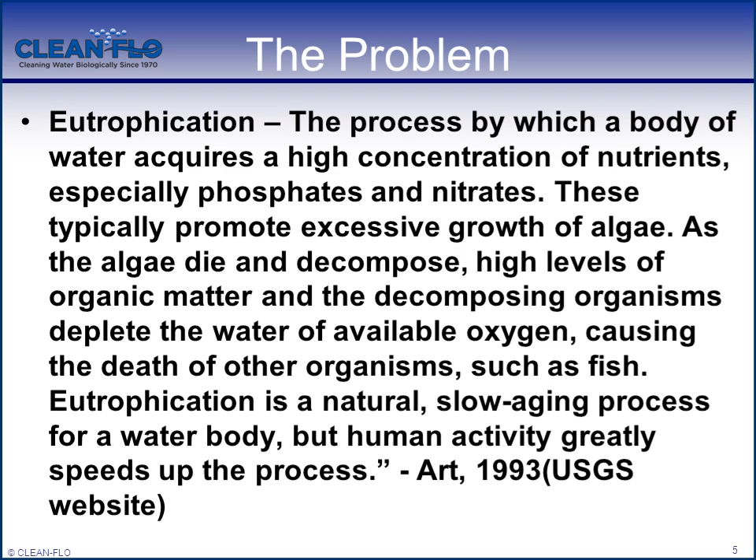EPA's website talks about nutrient pollution as being one of America's most widespread, costly, and challenging environmental problems. The problems in the Chesapeake Bay are all caused by nutrient loading coming through the Susquehanna. The Susquehanna has problems of its own. It used to be a world-class bass fishery down through the southern part of the Susquehanna. I used to fish it every Saturday and Sunday as a kid. The bass now have endocrine disruptors so that they aren't actually breeding anymore in the Susquehanna. It's all a result of nutrient pollution and eutrophication.

Herbicides and pesticides may exacerbate the problem. A lot of people will go out and see weeds and algae, and they'll immediately start putting copper in, other compounds, reward, trying to kill the plants. The problem is that every plant you kill goes to the bottom and ultimately in the decay process uses up oxygen.

What happens is if you went out on the lake during the summer, in the middle of July for instance, and dropped a dissolved oxygen probe down through the water column, you would see that oxygen levels are high at the surface where you get wind and wave action. As you drop that probe down through the water column, oxygen levels start to drop. Closer you get to the bottom, many times we see zero oxygen at the bottom, meaning those sediments are totally anaerobic. If you pull them up by hand, you would smell hydrogen sulfide. There's methane in that muck and those sediments as well.

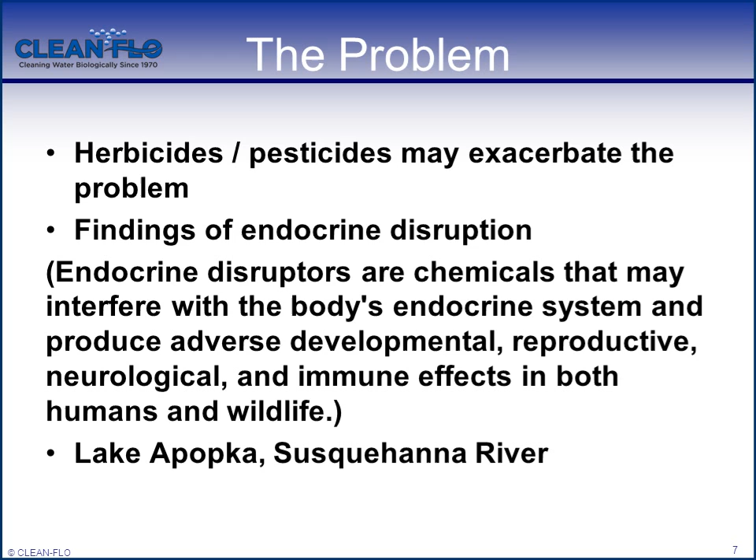So what do we do? We basically call our process inversion oxygenation. We want to get oxygen from the top to the bottom and into those sediments at the bottom. Just think of it, if you have a compost pile on your property, what's the best way to get that to break down quicker? You turn it, you get air into it. So when you turn it frequently, you're getting air into it, that gets oxygen into it, that lets natural microbes break that down.

We're doing the same thing, but we want to do it to the very bottom of the lake. And we're going to do it with laminar, non-turbulent flow principles, so that even though we're circulating a lot of water every minute, we're doing it in such a way that turbidity and suspended solids actually reduce and don't increase. So the water quality gets better, and meanwhile we're going to maintain aerobic conditions at the bottom. Hydrogen sulfide gets eliminated, methane gets eliminated, carbon dioxide gets eliminated.

So you don't have the noxious gases on the bottom that would typically build up. By doing that, we can introduce beneficial microbes. There's natural microbes as well, but we usually introduce some additional beneficial microbes to really promote the process. And those microbes will then go and start to break down all that organic material and take up the nutrients.

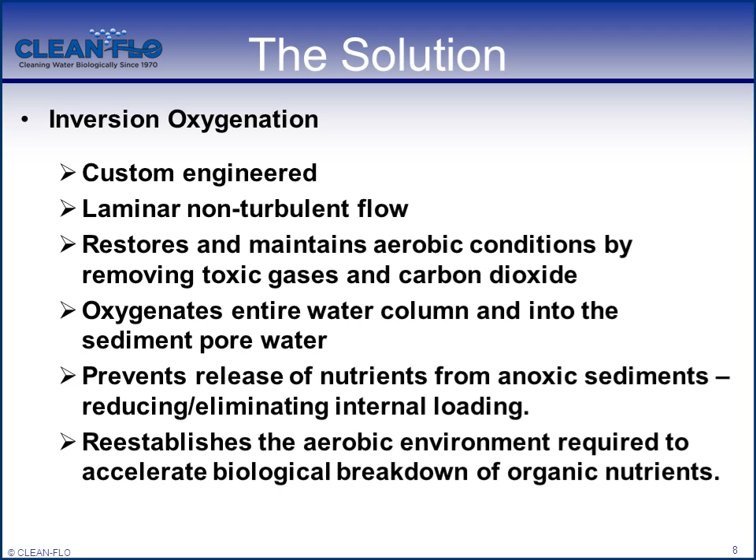So what we've done is designed a solution that includes compressors and air line, which is self-sinking and sits on the bottom of the lake, plus distribution manifolds which take the air and distribute it to multiple diffusers that sit on the bottom. Those diffusers are microporous ceramic.

All right, what's your minimum safety protocol for such a line being on the bottom if you have speed boats going over the top? As far as depth, you mean? Correct. It's probably based on the depth of the draw of the boat, but we've had these lines in 2 feet of water and haven't had a problem. 2 feet of water, but not a motorboat going over it? In some cases, yeah. Now if you've got a draw, if the prop's down 2 feet, you're probably going to whack it, and in that case we may have to make some adjustments.

That's a thick-walled, self-sinking airline. It's 5/8 ID, 1.02 OD, so it's pretty thick. If someone hits it with a prop, it's going to get sliced and would have to get spliced back together. So in some cases, quite frankly, we do not want to have diffusers in 2 feet of water.

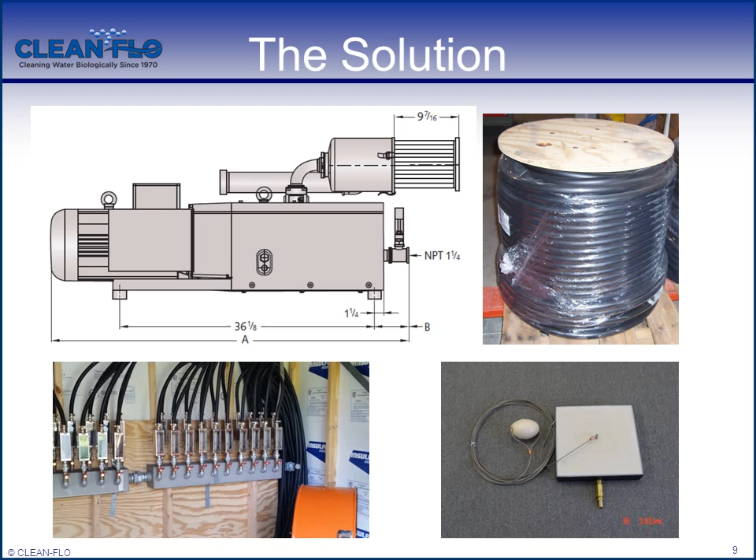Back to my original question, what's your minimum safety depth? I'm just curious because we have some shallow ends, and I want to know your safety parameters. Well, we'd have to look at where the diffusers are going to lay out to see what the water depths are. Every diffuser in our preliminary design is in deeper than 5 feet of water, so I suspect the airlines will be in deeper water too. We're not pushing these up into 2 feet of water because the bubbles stay in the water such a minimal amount of time from a diffuser at that depth. So we've got these at a minimum of 5 feet of depth.

Bioaugmentation basically revolves around the fact that when you have anaerobic conditions at the bottom of the lake, beneficial microbes, which are aerobic, have no oxygen to survive. And when you have no microbes at the bottom, that's when you start to build up that muck layer, because it's anaerobic and the microbes cannot survive. So when we fire up aeration, natural microbes slowly start to come back into the process—there are microbes on the grass around the lake, microbes in the leaves, and ultimately natural microbes get into the lake.

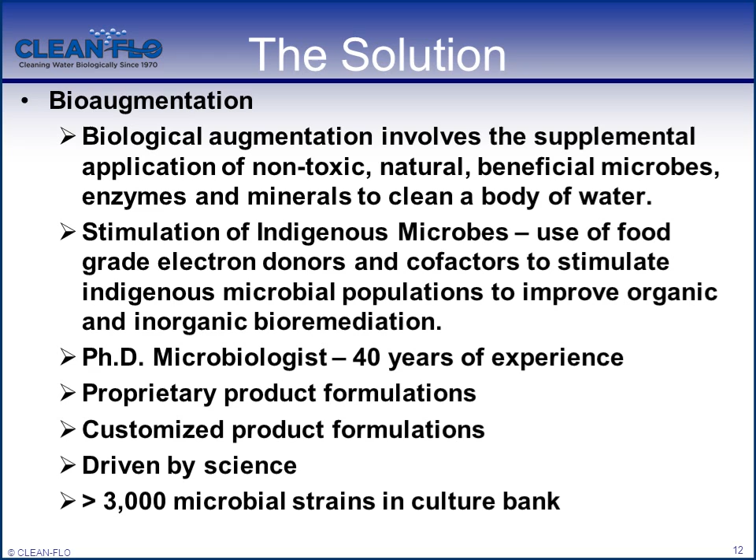This product is called Winter Warrior. Typically microbes love warm water. In the Lake Apopka project, we were able to reduce 1 to 1.5 feet of muck in 10 months, since the water was warm the whole time. Microbes perform better when the water is 55 degrees or higher, so when we work down south, muck reduction happens quickly. When we work up north, it happens much more slowly.

In this area, we'd estimate 4 to 8 inches of muck reduction a year, running the system throughout the season, roughly March 15th to December 1st. In winter, you'll probably want to shut the system down. We do run systems all year in a lot of locations, but most people shut it down just for liability reasons.

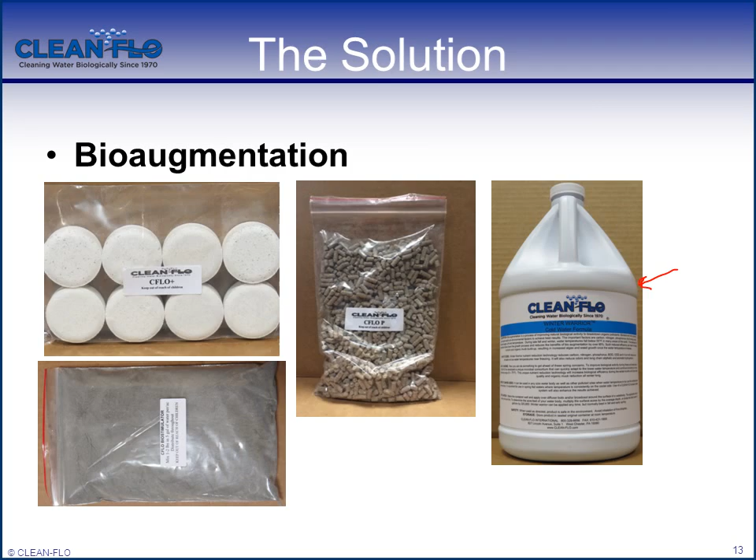I'll show you an example of one in Puerto Rico. We've also done rivers, including designs for three dams on the Susquehanna: the Conowingo, the Holtwood, and one other I forget. Behind those dams, when they dammed up the river, they created a big eutrophic area that's now just accumulating nutrients. When Hurricane Irene toppled over the Conowingo, all the nutrients from inside it went downstream and killed all the shellfish in the upper end of the Chesapeake. There are aerial images showing the contamination going down into the Chesapeake, and all the oysters, crabs, and clams were wiped out.

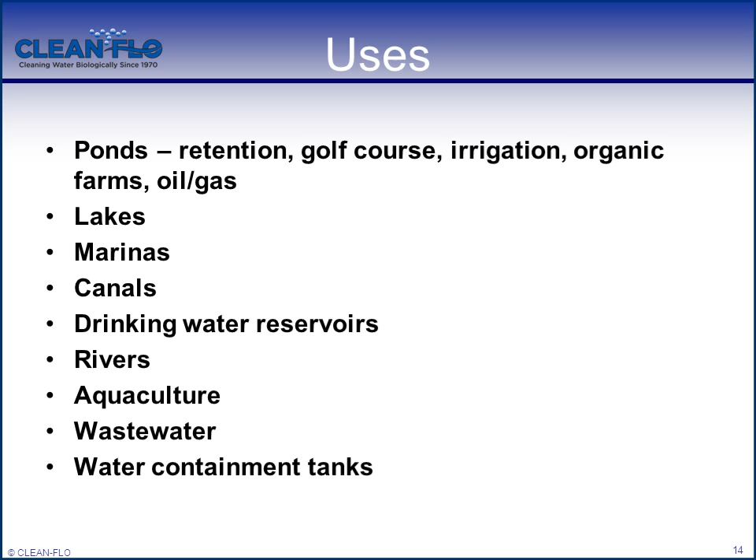Sometimes lakes don't even think about testing for bacteria, and especially because of leaking septic tanks, we'll often find coliform levels higher than state limits. Our process reduces pathogenic bacteria because they don't like highly oxygenated water, and since we're constantly moving water to the surface, UV from the sun knocks out the bacteria. We can very quickly reduce bacteria levels.

Did you have a question?

Just listening — odors, fish kills. Aeration actually improves the overall fishery. So if anyone here fishes the lake, give it two years, and you'll see the fish will be bigger, livelier, more vigorous in the fight, and you'll also develop a higher biomass, so you'll have better reproduction rates.

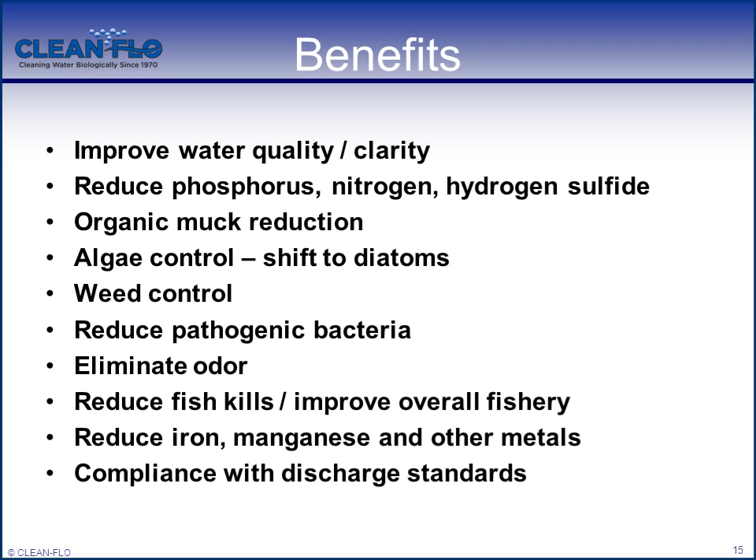Other benefits include oxygen levels and ice prevention in some cases where it's needed. We basically have a lot of these systems in organic farms.

You've heard some of the problems with bacteria, like at Chipotle, for instance. That's coming from their irrigation water. They're irrigating out of ponds that are eutrophic with high levels of bacteria. They put it on the lettuce, it goes into the store, it's not blocked properly, and the next thing you know people are developing digestive issues. So organic farms have increased the need for aeration. They want to clean the water and make sure bacteria levels stay down.

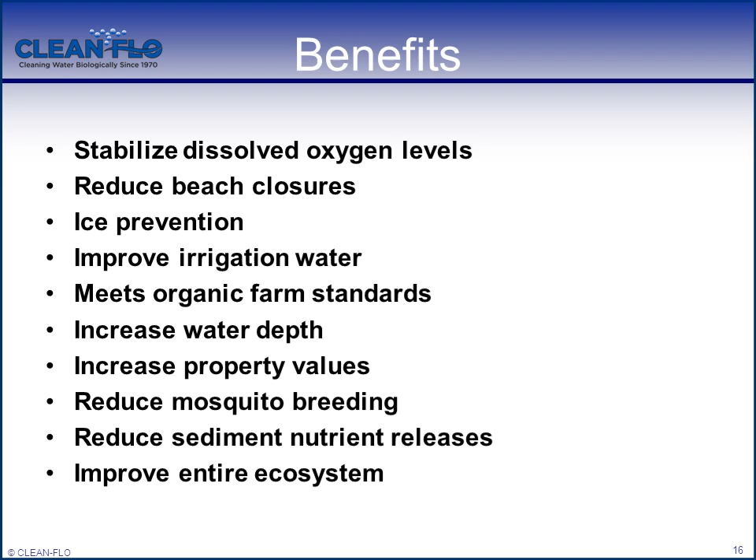One thing we always talk about is increasing property values, because if you can improve the lake, reduce nuisance algae growth and nuisance weed growth, that's a big deal. There are a lot of lakes in this country with blue-green algae, and blue-green algae is now found to be a trigger for ALS and Alzheimer's. There's a lot of science being done on identifying blue-green algae, and there are many forms of it, but one of the things our system will do is reduce blue-green algae by reducing nutrient levels.

Here's Lake Apopka, a 30,800 acre lake, with a pilot area of 250 acres and tremendously high levels of blue-green algae, off the charts. I was almost afraid to be on the boat with the levels of blue-green in there, and there was a tremendous unconsolidated flock. At one point there were 28 fish camps around the lake; today there are zero. So we went in, designed the system, and did the whole thing.

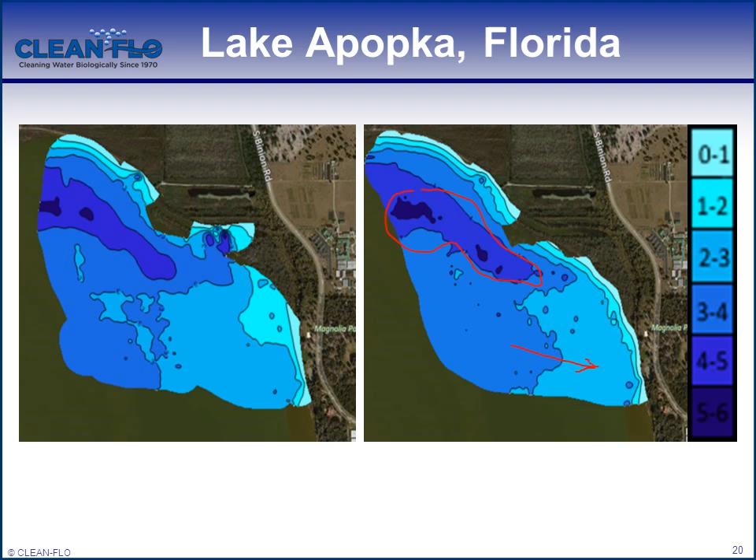Here's the depth testing, done through a program called BioBase. Ideally we want the maps to get darker over time. This is at the beginning, this is after 4 months — you can see the darker area starting to move in. This blue area got longer and wider, and this area is starting to pull down. After 10 months, the blue area pulled down across just about the entire area. We picked up anywhere from a foot and a half to 2 feet of additional water depth in this area in 10 months.

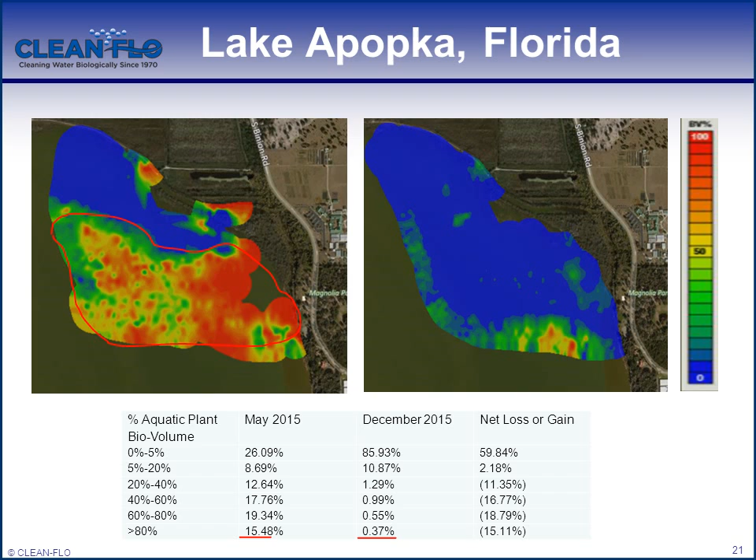This is another way to look at it — a biovolume map. Again, we want everything to get darker over time. The higher levels of biomass show as yellow and red, so you can see what happens over time: the biomass gets wiped out and we start to get back to hard bottom. In this case, 15.5% of the area had over 80% biomass, and after 7 months that had dropped to 0.37% biomass in those areas. That's just an aerial of the area — the lake is quite large, and we basically took an area like this and isolated it.

Here's a drinking water reservoir. A lot of times in drinking water reservoirs they deal with iron and manganese, which raises treatment costs and produces a taste and odor issue at the other end. If you've ever been out of town in a hotel, taken a drink of water, put it up to your nose and smelled foul odors — chances are that water's coming from a reservoir that can't deal with all the iron and manganese. The benefit of aeration is that we can flock that iron and manganese to the bottom, so they no longer have to treat it at the plant. Using aeration in drinking water reservoirs is highly beneficial — typically the payback occurs within the first year just from plant savings.

This particular plant had 6 intakes, and the water could fluctuate 70 to 80 feet. They would always pull off the top intake, and as the water dropped, they'd pull off the next intake, and the next. They could never pull off gates 5 and 6 because the water quality was always so bad. As I said earlier, oxygen is always high at the top and low at the bottom. With a gate 15 feet off the bottom in this reservoir, the water quality was so bad they couldn't open it or use it because they couldn't treat it — they would have been putting contaminated water in people's taps. It was blue-green algae dominant with many fish kills.

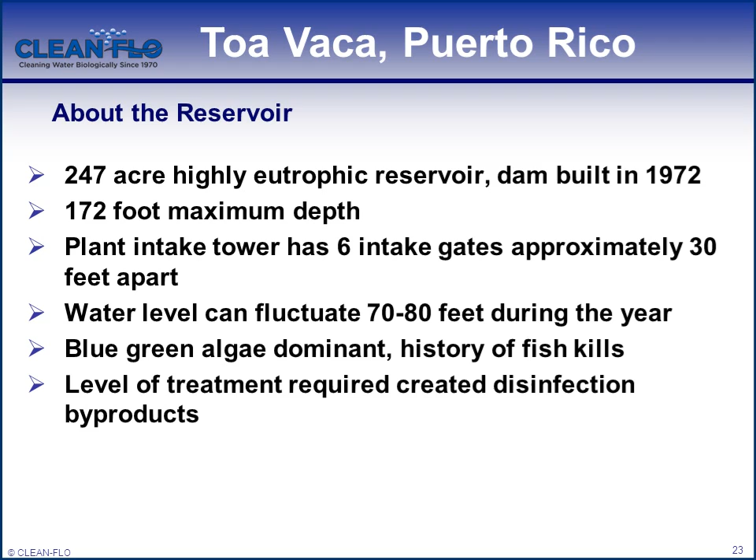So we engineered a system, installed it, and established monitoring stations in 3 locations, tracking the data with remote monitoring for 4 years. We could see the levels of contamination reducing over those 4 years.

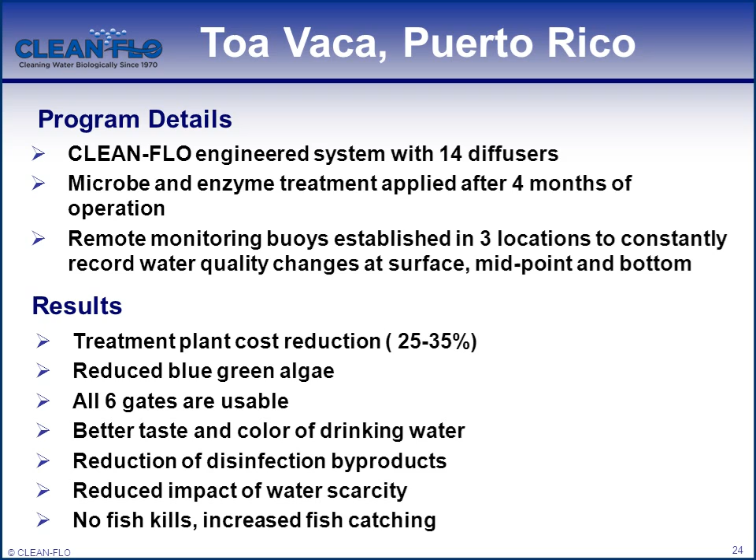Basically what's happened is their treatment plant costs reduced by 25 to 35%. All 6 gates are now usable, and they've got better taste and color of drinking water. When you treat drinking water with high levels of manganese and iron, you end up with disinfection byproducts, which are actually carcinogenic and not uncommon in everybody's drinking water. We were able to reduce the disinfection byproducts coming out on the treated side through aeration.

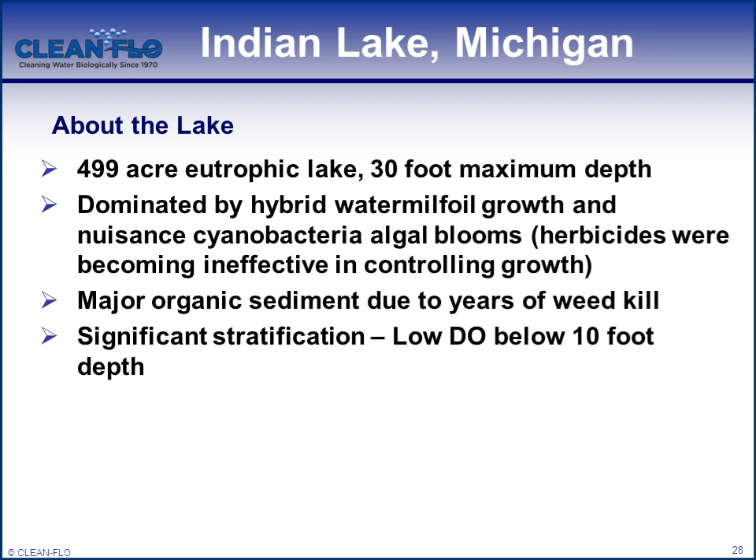We put 37 diffusers in this lake with 3 compressors. We saw significant reductions in milfoil - it was actually written up in the Michigan Riparian. There were major reductions of organic sediment and ammonia, and the firm that studied this lake has now concluded that the reduction in ammonia from the aeration is one of the triggers in reducing the milfoil growth.

Ammonia is a nitrogen component, and milfoil likes nitrogen - it picks up nitrogen through ammonia. By reducing ammonia in the sediments, we're eliminating one of the food sources for the milfoil.

One of the other things they did in the same study was analyze how far down we could get oxygen into the sediments. Think about it - you reach down, grab some, pull it up, it's stinky. Now you put aeration in, and the only way to eliminate the stink is to get oxygen into the sediments.

So they measured 8 centimeters down into the sediment in 27 locations in this lake and found that the average oxygen level at 8 centimeters was 6 parts per million of oxygen, which is pretty high - very high, actually, for sediments. The benefit is that microbes can now get in there with the water and start to clean up even 3 inches or 8 centimeters down into those sediments.

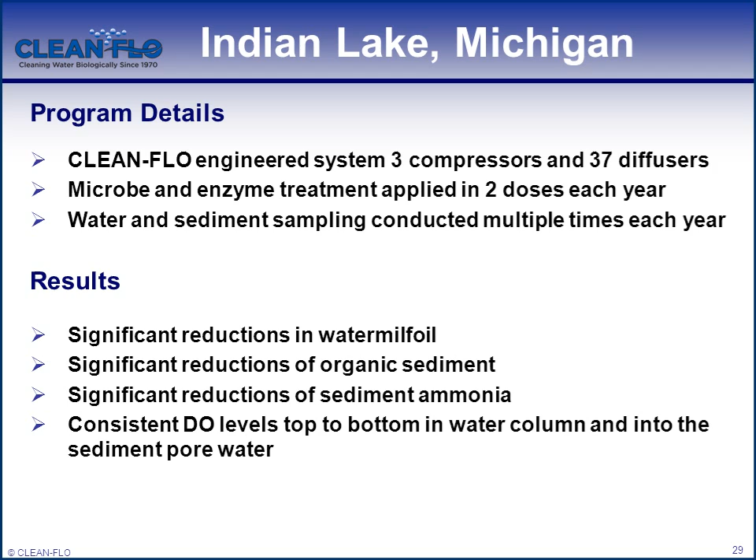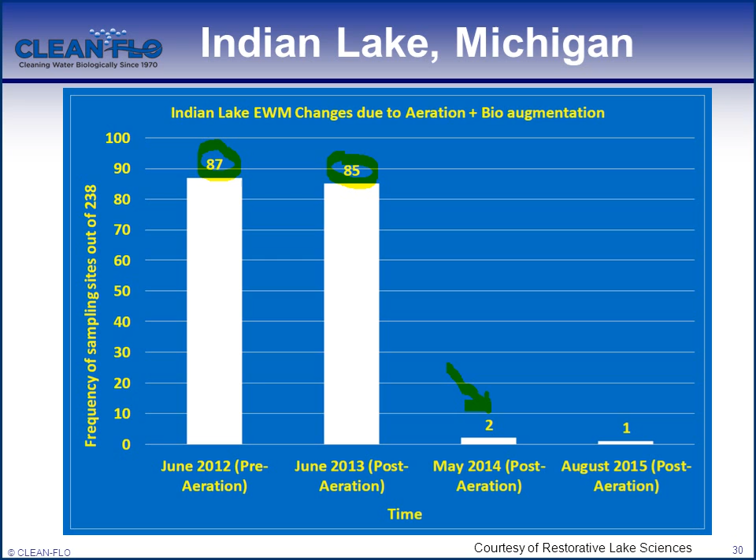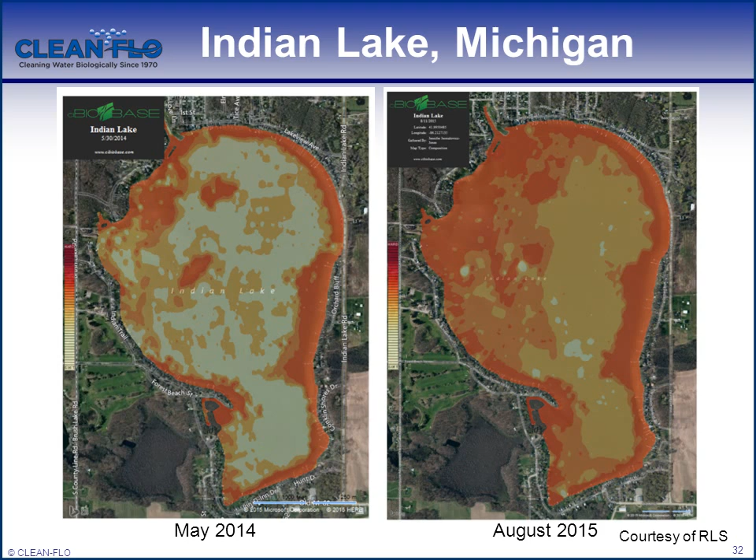Here's the maps on Indian Lake. Again, going darker - white is all soft bottom. This is one year difference, from May 2014 to August of 2015. You can see the white starting to turn dark, we're starting to eliminate that muck layer. Take a look at this - soft bottom was 25% when we started, and after 14 months it dropped down to 0.3%, almost a 25% reduction in that level of soft bottom.

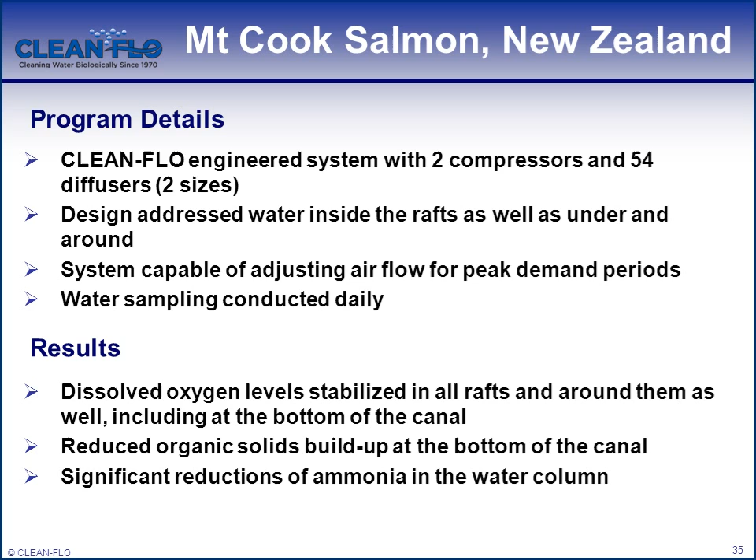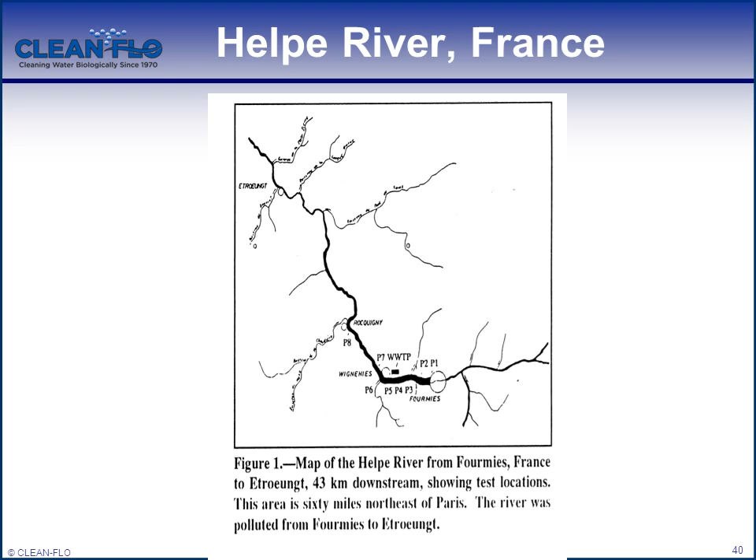One last example, a river in France, the Helpe River. We basically side-streamed this river - built a retention lake and side-streamed the river into the retention basin, treated the river there, then released the water downstream. That's the retention basin right there. Basically took something that was class 3 to 4, unusable for every purpose - it was just a crap hole.

There was odor coming from the river, so people living along it were complaining constantly. After we oxygenated the water, treated it, and put it back through the river, we had 70 to 100% saturation. We also converted it from that class to class 1, meaning usable for every purpose. The mayors of the 2 towns involved in bringing this project to life both received national environmental awards for bringing the technology to this river in France. The interesting thing is the water quality was maintained for 43 kilometers downstream before it degraded back to the point that they lost fish and started to have odors again.

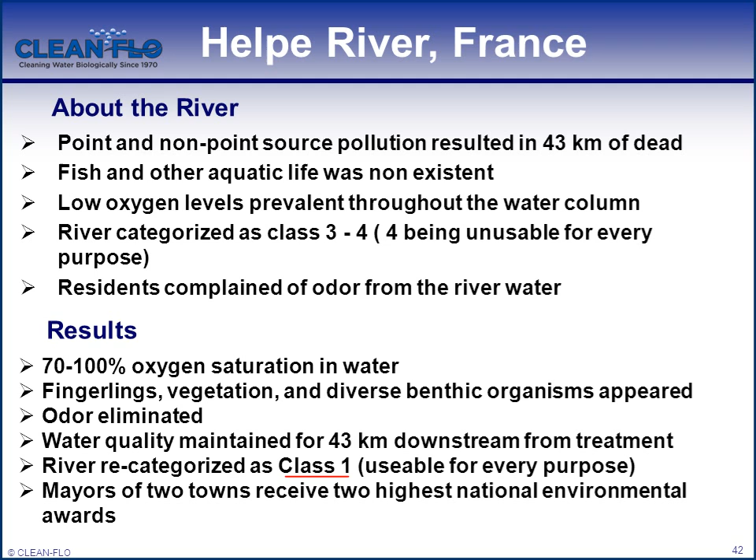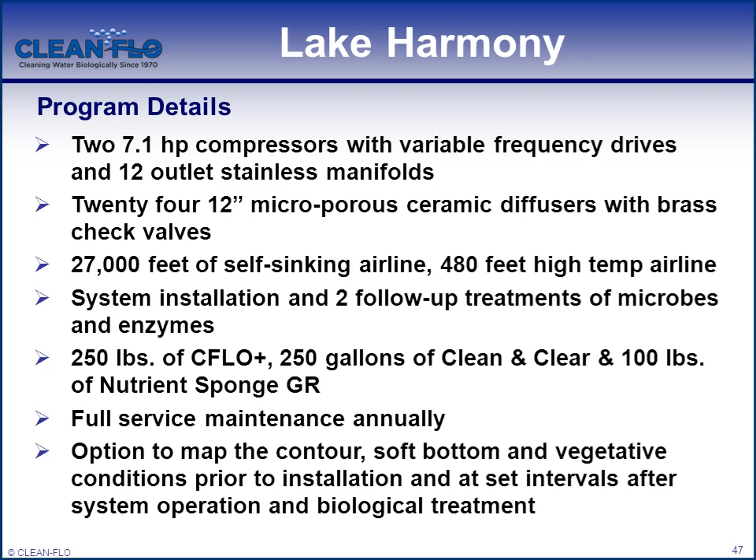As the lake cleans up, do you have to add airline? Typically not. No, typically not.

I got a couple of questions.

All right, so we got 24 machines or diffusers. Correct. They're bought or rented? It's all bought. Everything's bought, including the airlines and the compressors.

You're saying 6 inches, like you said, 4 to 8, so I'll compromise and say 6 inches of sediment possibly cleaned up for a year.

Do you know what the depth of our muck is to hard bottom? In other words, it varies throughout the lake. I don't know the specifics, but in one of those reports they have a biovolume map that shows where the concentrations are. From talking to Kathy, Joe, and my friend Miguel Pascual, who also lives on the lake, everybody said there's certain spots that are hard bottom, and then other spots that have 2 feet of muck. So it really varies throughout the lake.

And that's one of the things mapping in the beginning would show you, what you're starting with, and then you could compare the mucky areas a year later.